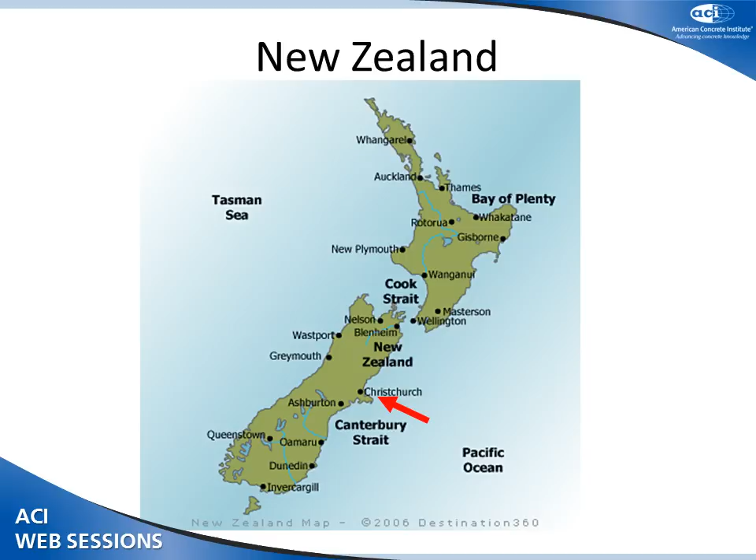For those who do not know, New Zealand is three islands in the South Pacific, about the land area of the United Kingdom. Christchurch is down there where the red arrow is, and the bump on the side is actually a very old volcano.

We've gone through an unprecedented suite of earthquakes. We're all trained as engineers to believe we have one large earthquake and then the earthquake subsides. Well, the big one was, as you've heard already in an earlier session, 7.1, about 30 kilometres away from the central business district. It was a rolling earthquake.

And then we had a 5.1 immediately under the city. It was a very different earthquake - short, sharp, and very, very nasty. Massive accelerations, both horizontal and vertical, but the durations were very short. And we had a subsequent suite of them.

I've been through all of these, but the last one - when you're within 5 kilometres of a magnitude 6 going off under your feet at 5 kilometres deep, it's quite a ride. In Christchurch, we had some significant vertical accelerations, in places up to 2G vertically. And again, we still haven't finished.

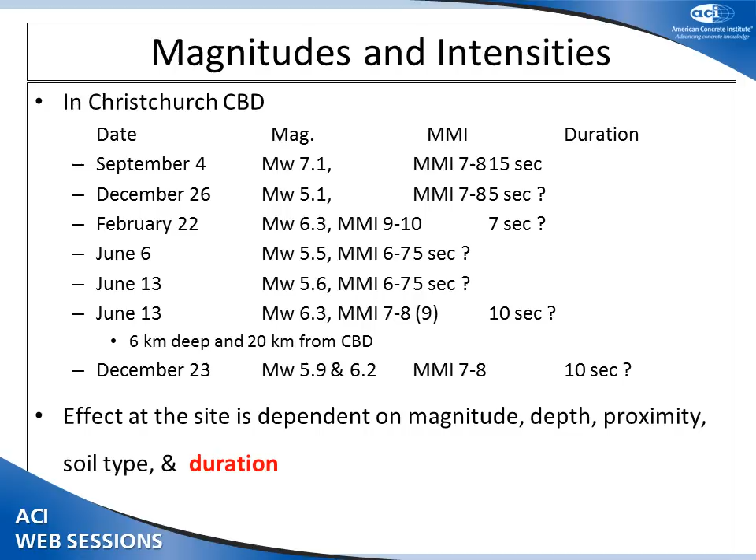As recently as the 23rd of December just gone, we had another couple of large earthquakes. I happened to be out of the city at the time, thank goodness. As we all know, the behaviour of a building, the effect on a site, is dependent not only on the magnitude, depth, and proximity to the earthquake and the soil type - we had a lot of liquefaction and settlement in Christchurch - but also obviously the duration.

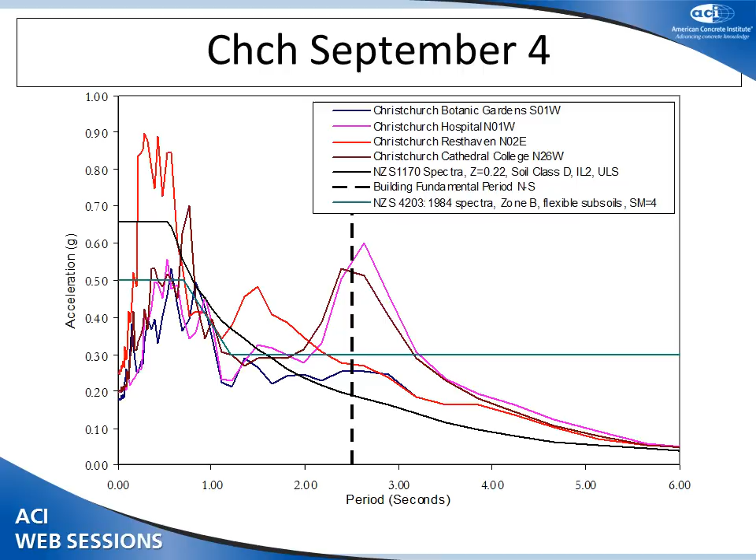One of our big problems is that our only base isolated structure in the South Island happens to have a response first fundamental period around about 2.5 seconds. The reason it didn't get into too much trouble was because the earthquake wasn't long enough to get the large base isolated hospital up into the resonance mode.

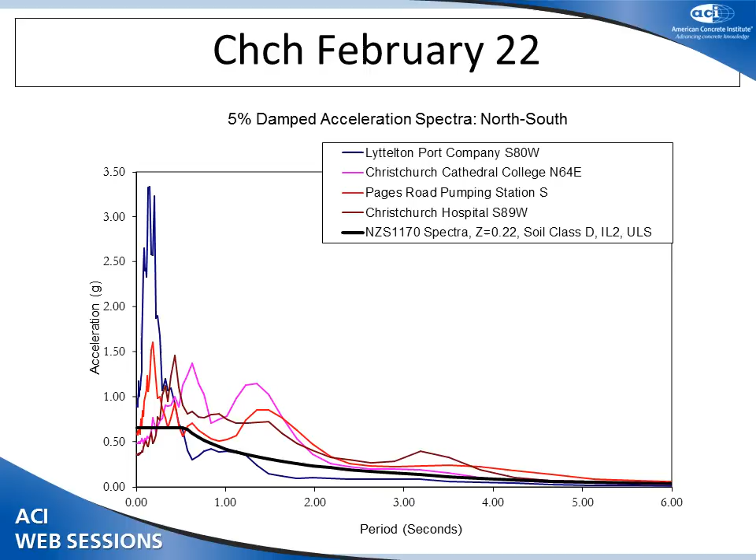This is a response spectra from the big earthquake, the Christchurch earthquake, where we lost 185 people. As you can see, the spectral acceleration was over 3G in the short period structures. Needless to say, unreinforced masonry buildings didn't have a show of surviving.

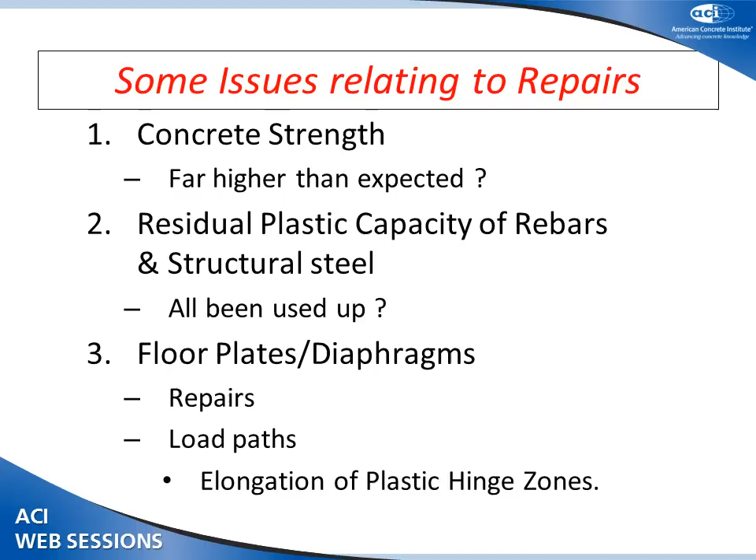Some of the issues related to repairs: concrete strength was far higher than expected, and I'll explain why that might be an issue for all of us, including the code writers. There's also the residual plastic capacity of bars and structural steel - this isn't just a problem for reinforced concrete, but for structural steel too. How much plastic deformation capacity is left in that member or bar after a major shake, let alone a series of shakes? And of course, the big one is floor plates and diaphragms - are they repairable, have we lost the load paths, and can we reinstate them? Plus the effect of elongation in the plastic hinge zones of beams.

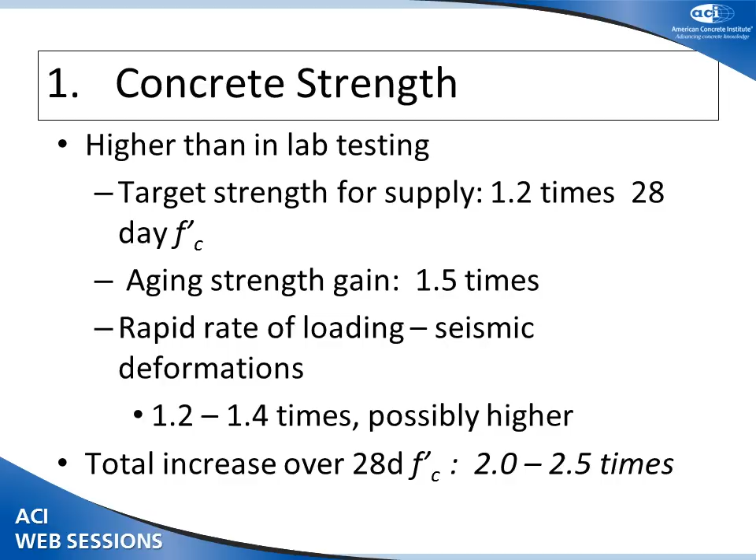Concrete strength: the concrete strength we are seeing in structures is obviously higher than the lab concrete used to develop our engineering equations and recommendations. A supplier of concrete will be targeting about 20% higher than the engineer specifies. Age enhancement of strength adds about 1.5 times the strength. Under dynamic loading, the tensile capacity can be 1.2 to 1.4 times larger, meaning the compressive strength can be anything from 2 to 2.5 times the lab value.

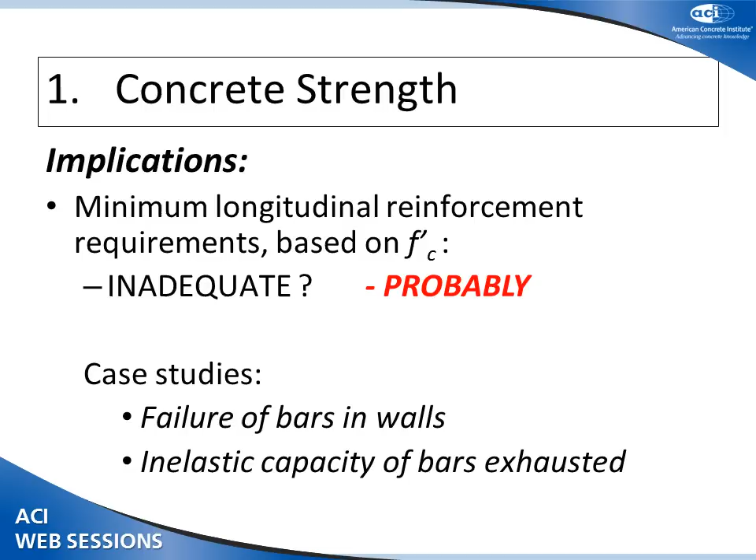The implications are: are the minimum longitudinal requirements in our standards sufficient for the real concrete, as against the lab concrete the equations are quantified against? As a general rule, we spec minimum steel contents, particularly in walls and some beams, that were not enough to start with. Add the fact that the tensile capacity of the concrete is significantly larger, and we find there is not enough longitudinal reinforcement to form a distributed crack pattern and spread the plasticity. Any crack that opens confines that plasticity to a short length of bar.

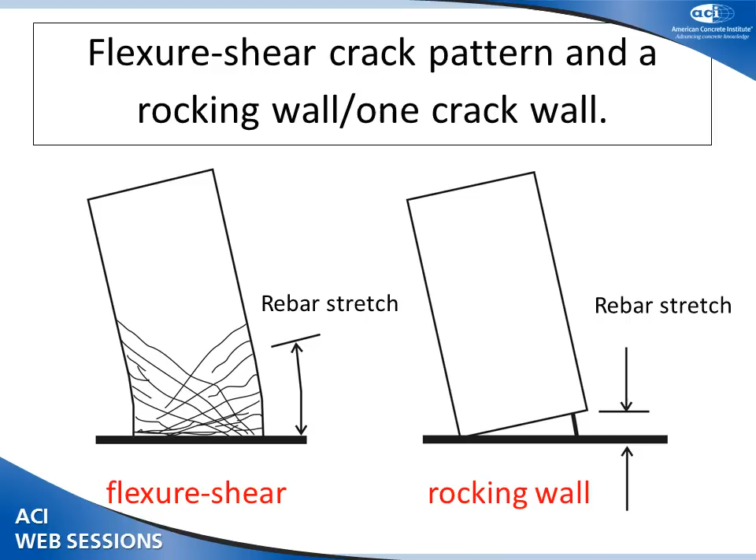Here's a couple of case studies. What we're expecting from all our studies and from good, well-detailed walls in the field is a spread fan pattern of cracking - flexure-shear cracks - which distributes the stretch of the rebar up a reasonable height of the wall. What we are actually getting, and have seen in numerous buildings - I've personally seen four, and know of at least another five in Christchurch - is that walls designed for flexural yielding actually only split at one crack, typically the construction joint above the beam or foundation, with all the bar stretch concentrated at that one crack.

Here's a situation: this is a 2005 building, very expensive condominium apartments. The tall building on the left is the one we're talking about; the squatter building on the right is our emergency operations centre right next to it. About day 3, I got a phone call from Professor Andrew Buchanan at the University of Canterbury saying, 'we've got something funny here, we've only got one crack at the base of the wall.' That means two things: either the walls did not get loaded, or something really bizarre happened.

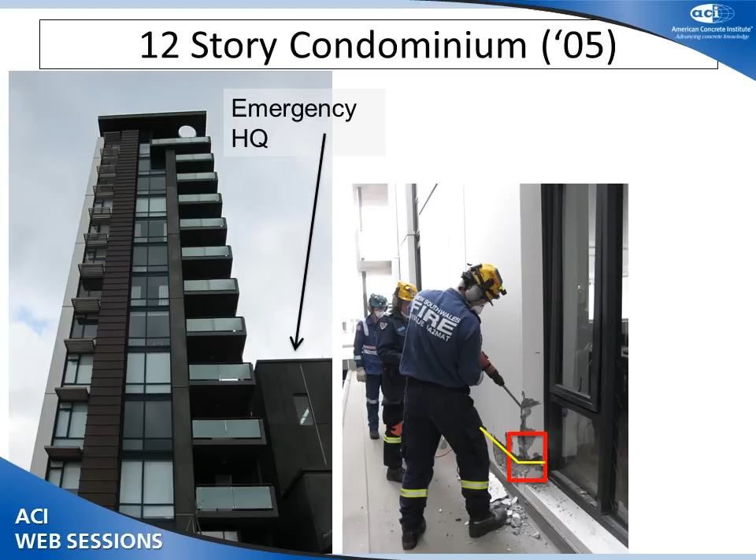So I was there and asked for a team to come in - an Australian urban search and rescue team was available. They came in with their gear and started hacking away the walls for us. By this stage I had about five other engineers standing there. We got into this area, and that's the blow-up of that shot. One of the engineers said to me, 'that's a really funny-looking lap.'

If you notice, the bars are actually coned, with a nice little cup at one end - the bar's fractured. Another engineer said, 'well, that's okay, it's just the bars at the end of the wall.' I said, 'I bet it's not.' The Aussie team hacked out all the bars along that wall and another wall, and found that every single longitudinal bar in that 12-storey wall was fractured at one crack. I know of three other buildings where we had a look and found exactly the same problem - there simply isn't enough longitudinal steel to form a distributed zone of plasticity.

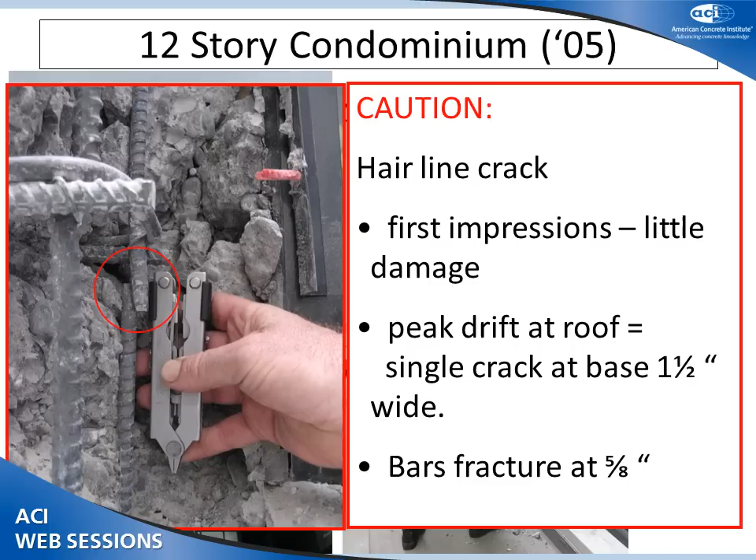What we found was that first impressions suggested the cracks meant there's no damage. I believe there's a recommendation in FEMA that if a crack in the wall is less than 5 mils, just epoxy it up - I'm not so sure that's a good tactic to take at the moment. We have another way of dealing with this, which I'll talk about in a moment. We found that the roof peak drifts led to that single crack at the base of the wall opening up about 1.5 inches, and we know these sort of bars fracture at 5/8 of an inch, so they didn't have a show of surviving.

The next question, following on from this, is: what is the residual plastic capacity of our reinforcing bars and structural steel? As I've mentioned, we're not getting hundreds of flexure-shear cracks - we're only getting 2, 3 or 4 cracks where all the deformation is concentrated. The other factor is that there are very high localized strains in the bars either side of those small numbers of cracks.

From laboratory work going back before even we were students, under multiple inelastic cycles you'd get yield penetration, bond failure along the bars, anything from 2 to 4 bar diameters either side of the crack. This is partly due to the loading scheme most laboratories have used over the years, which is to progressively deform your column or beam more and more.

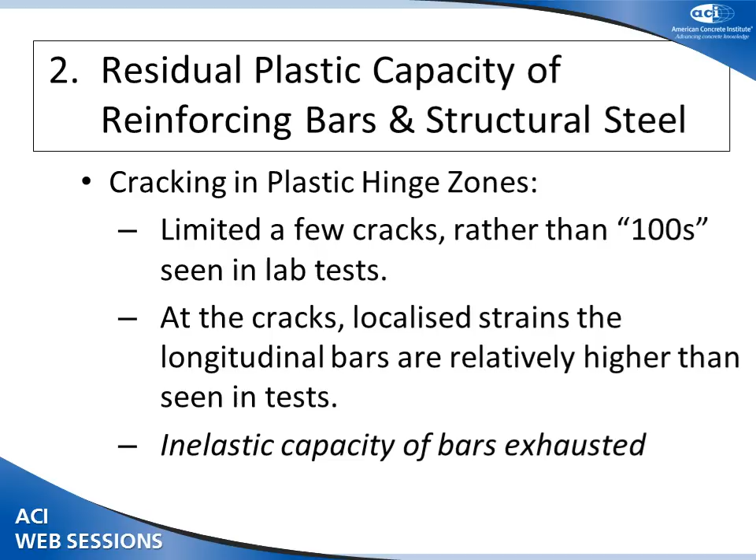This has led, we think, to progressive bond breakdown and a reasonable length of bar either side of a crack to distribute the plasticity. When we actually measured the plasticity, we found bond loss or yield penetration was about 1 to 1.5 bar diameters, not the 2 to 4 that's in the textbooks either side of the crack. So the local strain in the bars was 4 to 8 times higher than expected.

Fundamentally, the question is: if this is the actual stress-strain plot from a bar we took out of a building, where are we on that curve for that bar?

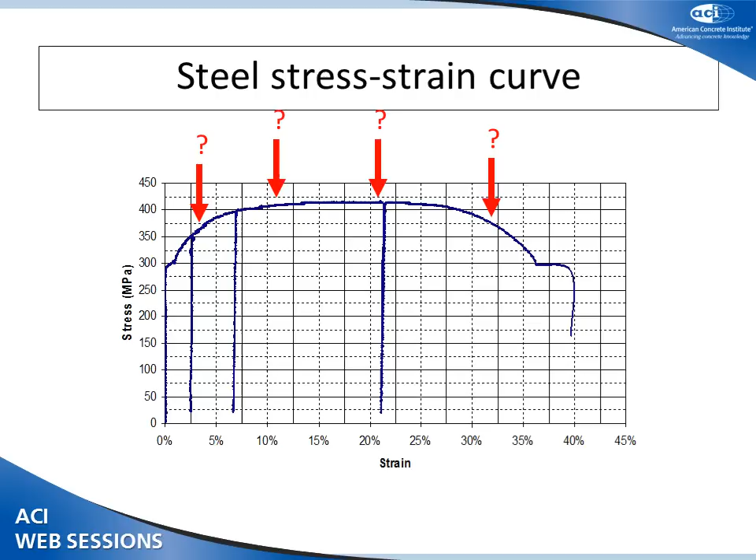The question we get asked in New Zealand is, can we, for engineering assessment—which all engineers are being asked at the moment in Christchurch and anywhere in the world after an earthquake—say the building can withstand aftershocks? Normally we would have said yes, generally. Is the building safe to reoccupy? We don't know. Is it repairable? We've found out in Christchurch, largely the answer is no. We've gone through so many large earthquakes that the cumulative ductility, the cumulative plasticity of those bars, there's virtually nothing left. As a general rule, we're actually demolishing buildings because we can prove there's not enough plasticity left in the bars or the structural steel beams.

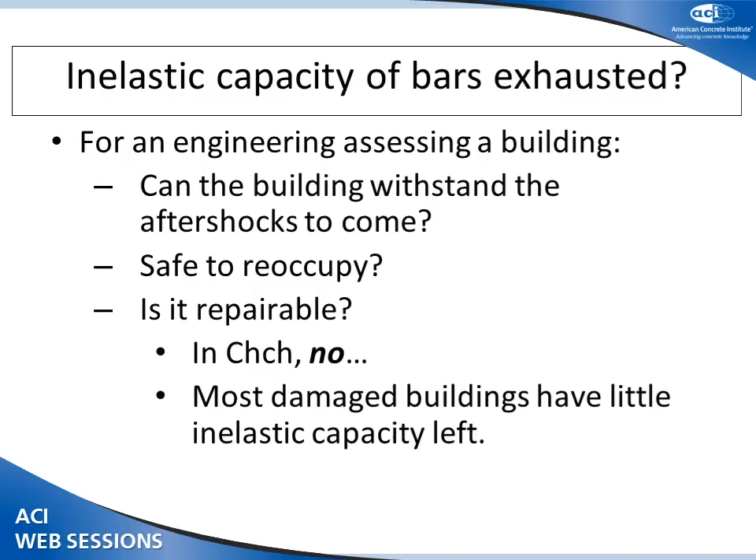The way we're doing this is with the Leeb Hardness test. It's a dynamic, portable, calibrated device. We calibrate it against the stress-strain curves of the parent materials. We take bars from parts of the structure where they have not been highly stressed, based on the ASTM standard. We relate those Leeb Hardness tests to where the bar sits on that curve, which lets us judge how much deformation capacity that building or element has remaining.

And we are very, very well insured in New Zealand, and unfortunately, a lot of buildings are worth more down than up.

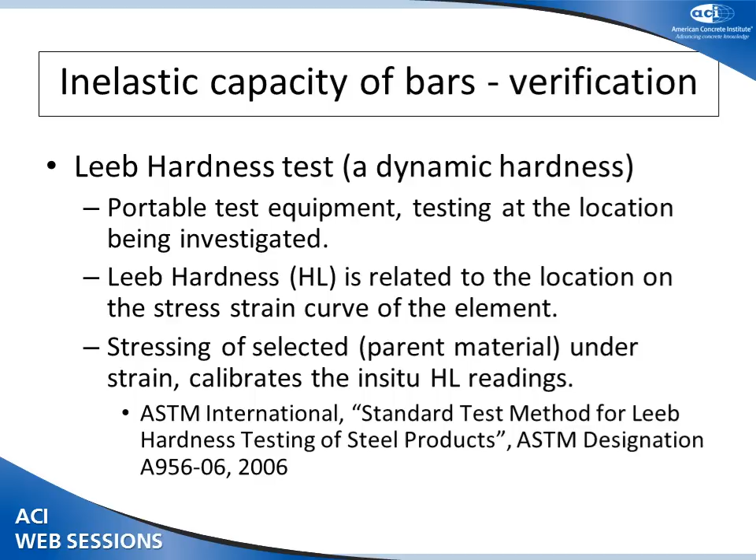Several of the insurance policies for big buildings in Christchurch state that if you cannot return it to 100% of the now code—not the old code, but the now code, accounting for changes and upgrades in seismic hazard—the building is basically considered a loss. And of course, if you've used up some of your plasticity, there's no real way you can ever return it to 100%. That's actually been a legal argument for demolishing what is basically a repairable building.

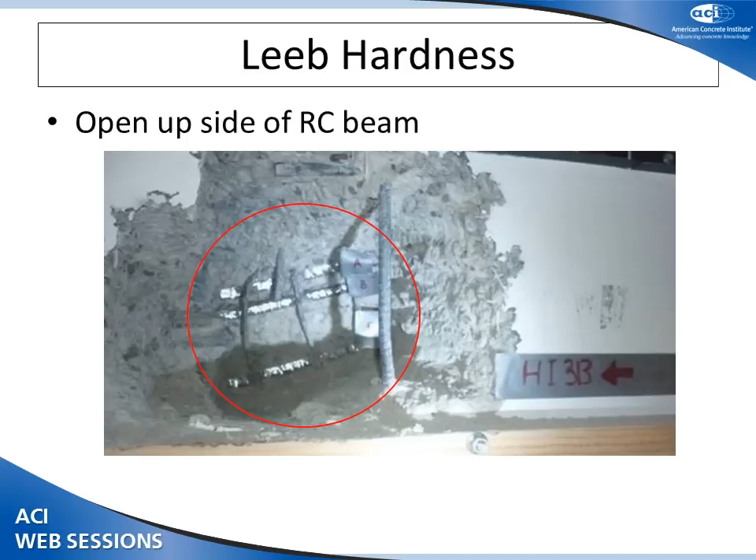Just some shots: what the technicians do is take the cover concrete off, prepare the surface of the bars we're interested in to do the Leeb Hardness test, which uses a bouncing steel ball—the change in velocity on rebound indicates the hardness. The technicians are very careful not to use heat, because that changes the metallurgy. They do the preparation with light sandpaper.

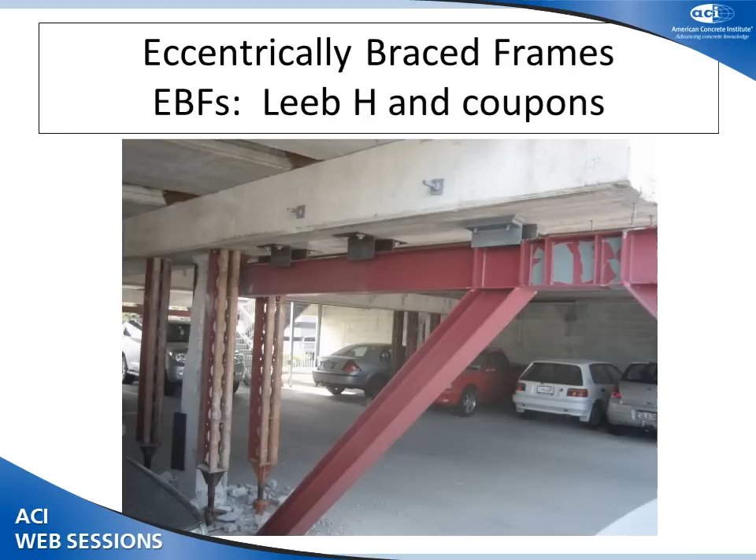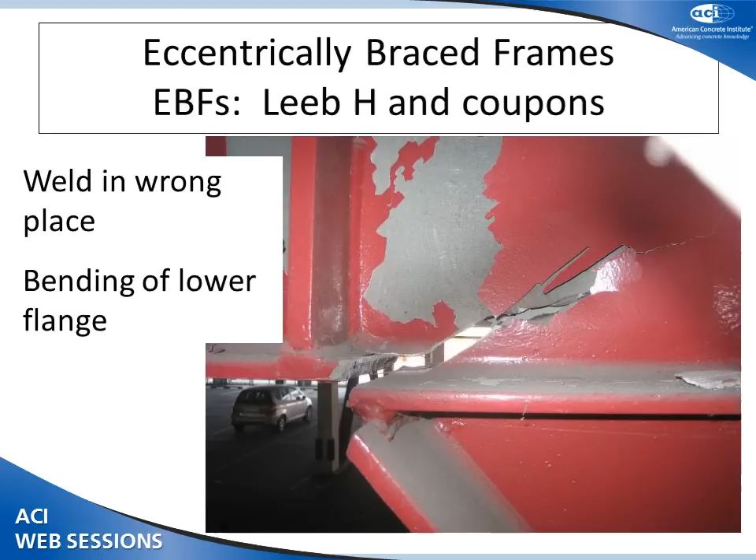So it's not a concrete problem alone—here's an example with structural steel. Here is an eccentric brace frame, an EBF, in a parking structure at the hospital. You'll notice the paint's flaked off; this is also what happened. The problem is that this weld here should have been there—if these were closer together, they should have welded that surface to that surface. They took a shortcut. That bend caused flexure in the flange, the flange tore, and it ran through the link.

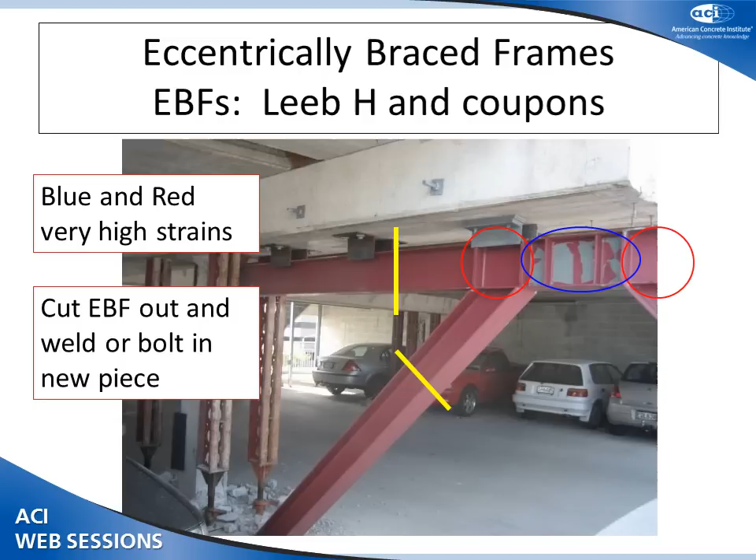Same shot again—these zones were measured using Leeb Hardness tests and water jet cut coupons, not heat cut coupons, and we found the strains there were right at the end of what was left in those particular elements. We also found the high strains worked out away, along the header and down the legs as well. The solution was to cut those pieces out and replace them in their entirety across the building.

Conventional beams in concrete, or conventional beams in general, elongate, they get longer during cyclic loading. Concrete's the worst. Structural steel does the same thing, but to a lesser degree. And timber, where you've got hardware or steel connections, you have elongation as well.

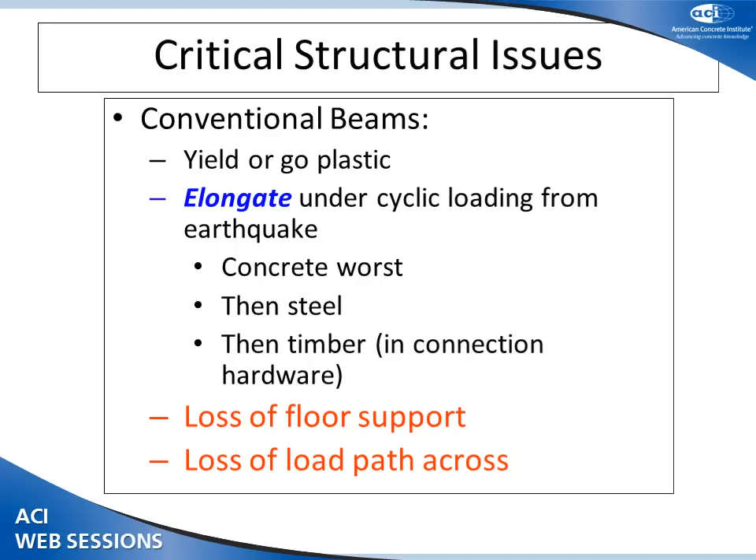The problems are the loss of floor support and a loss of load paths. So this is a beam in a lab, and somewhat dramatically, the beams actually do get longer. In the worst cases, up to 4% of the depth of the member. So if you've got a 3-foot deep beam, 36 inches, you can get up to 2 inches worth of elongation that you do not recover.

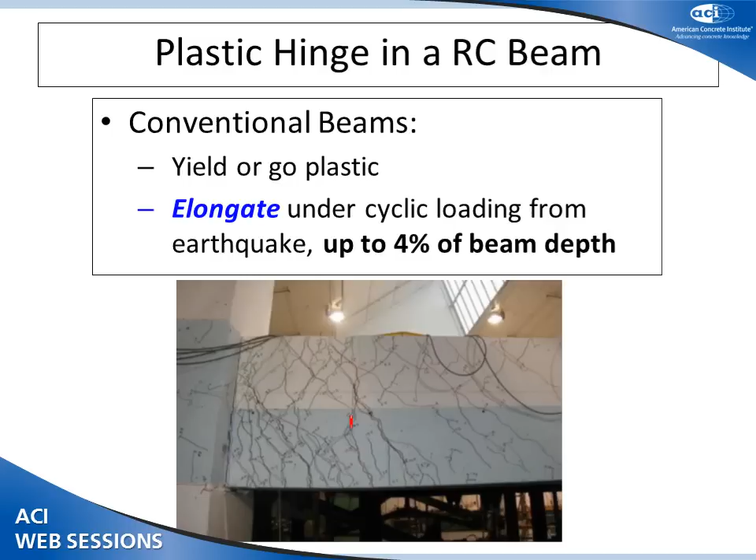I got told by an engineer outside New Zealand about 2 months ago that this was a New Zealand problem, and the Japanese in 1983 showed that wasn't a problem anywhere else. Actually, I don't think you need any convincing that this is a reinforced concrete beam that could be anywhere in the world, and it's just structural mechanics. They do get longer when they go cyclic.

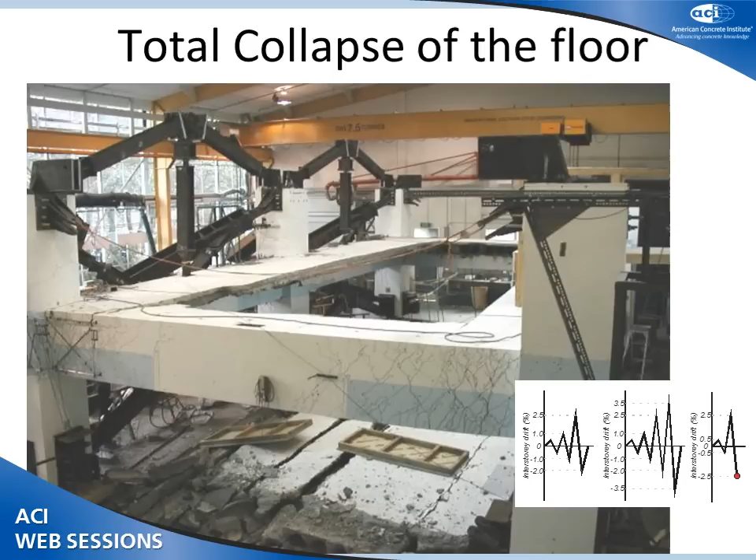This is a shot from the University of Canterbury research in about 2000. This is 30 feet, 35 feet, 35 feet this way and 17 feet this way. It's a 1 foot deep hollow core unit with a 2.5, 3 inch reinforced topping, and it's actually lying on the floor. It fell out at 2.5% drift.

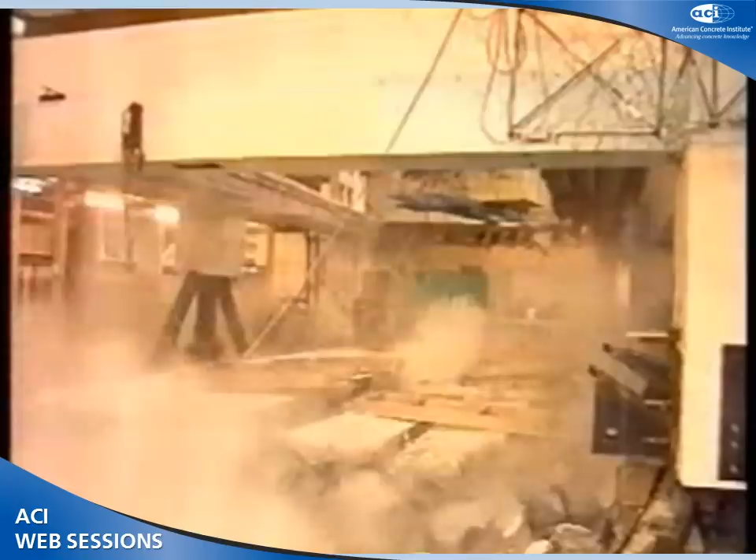This is looking down the other way. This is from underneath. This is me walking down the stairs towards that, that's part of the test, and then this happened. That weighs about a tonne per 10 square feet. And it hit the ground so hard that the seismographs and engineering geology on the other side of the campus picked it up as an earthquake.

You have one of those fall in one building, it takes every floor below it, all the way to the basement. So that started a number of changes in New Zealand codes on supporting our precast concrete floors, which is a dominant floor system in New Zealand. 99% of the floors in commercial buildings are precast floors with topping. That led to a number of changes through 2003 to 2006 in our concrete standards.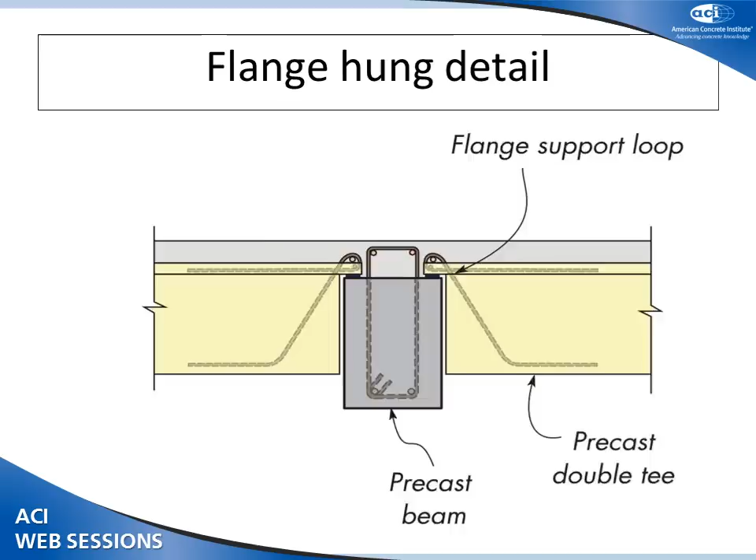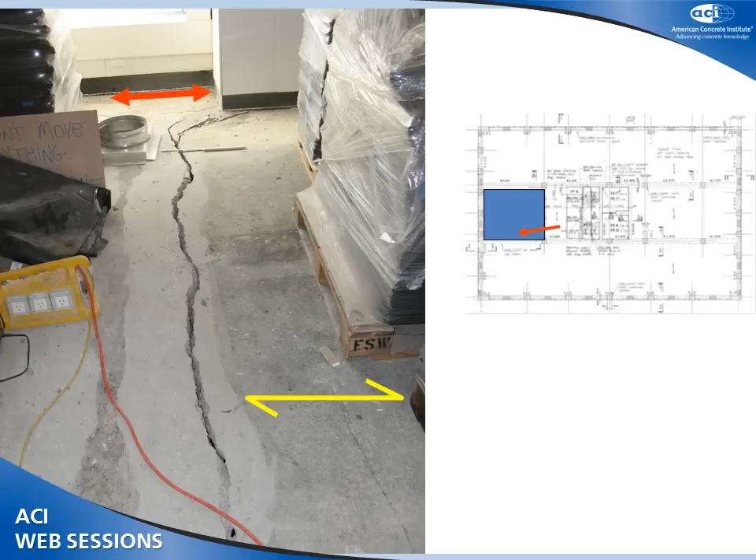Too much information there, but essentially that silly detail ruptures and the flange folds up and out of the way. This is looking at the middle zone of the building, and that floor tear there, the yellow arrows tell you which way the floors are moving. This is looking through that crack, about an inch wide, and the white light at the bottom is actually looking through to the room below.

The flange hung details, all the flange fixings completely failed. This dropped about 1.5 inches vertically. It didn't fall down because of catenary action, which you can't design for, running at 90 degrees to the direction of the spans. The same problem.

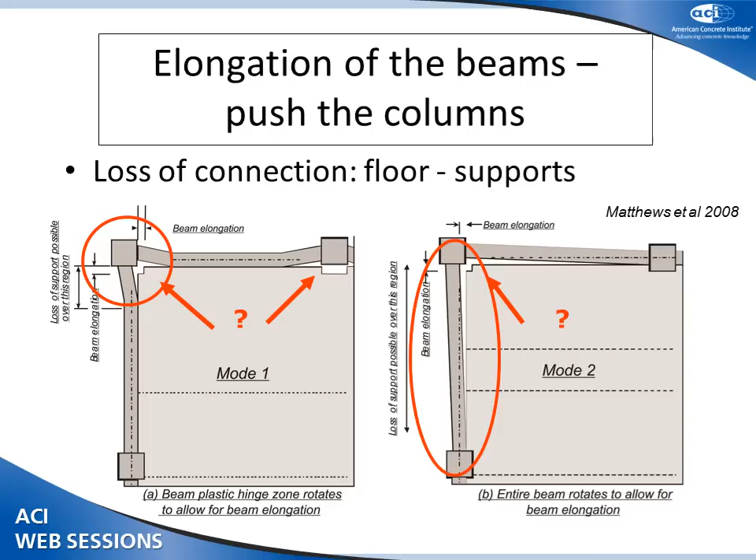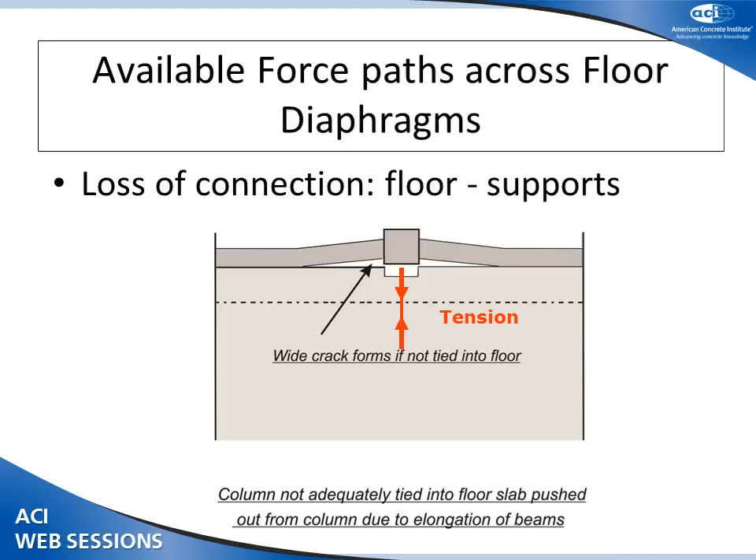How do we get our forces into this area? One of the other problems was if you do not have supplemental beams, secondary beams tying your columns into the diaphragm - this is a plan view like you do in steel and some concrete beams - what happens to the columns? Well, that elongation starts to push the columns out of the building. We didn't have supplemental secondary beams crossing the floor. What we were seeing was the columns buckling over several floors.

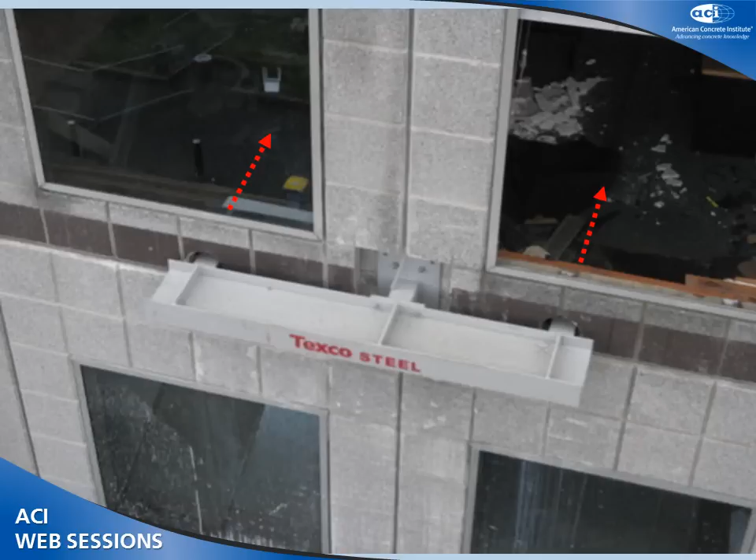So the intervention was to actually put these headed beams on the outside through the precast panels over a couple of floors spread across the building. This was an immediate step in to save us, put security in this building. This was not a long-term fix. This was a fix to allow the contractors to go into the building.

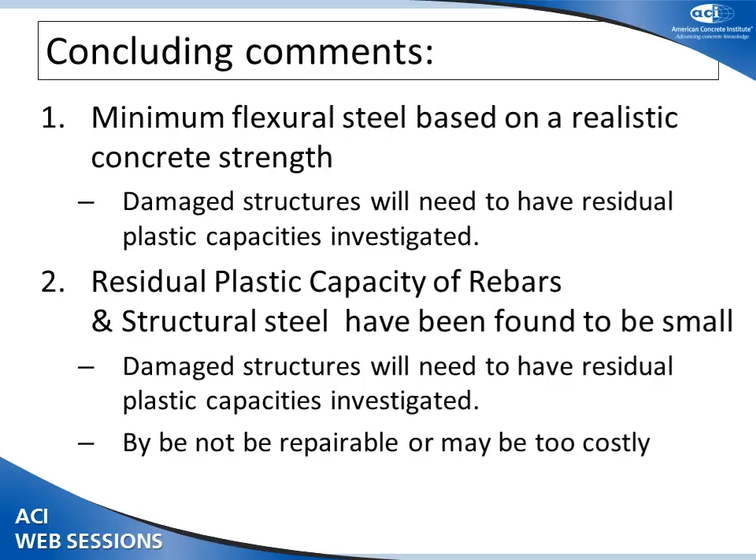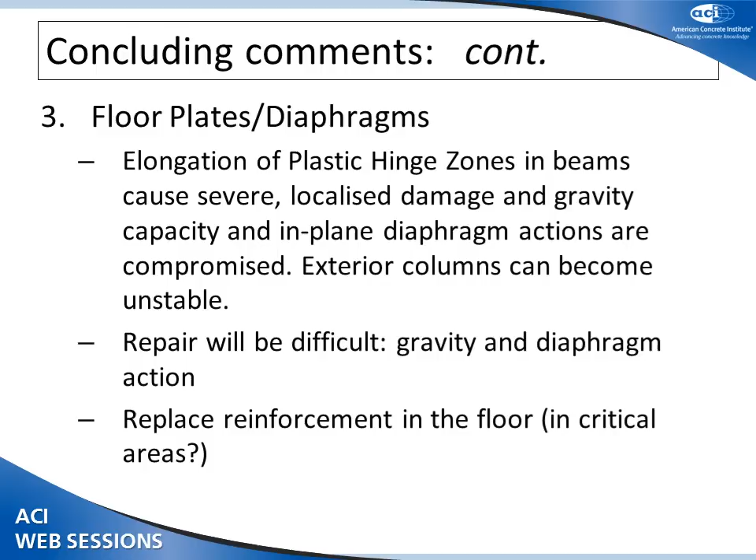Concluding comments: minimum flexural steels for realistic concrete strengths are probably insufficient in most standards around the world. Residual plastic capacities in bars and structural steel means that these buildings are probably irreparable. Floor plates, elongation is a universal problem and destroys the integrity of the diaphragms. Very difficult to repair and to replace the reinforcement in the floors.